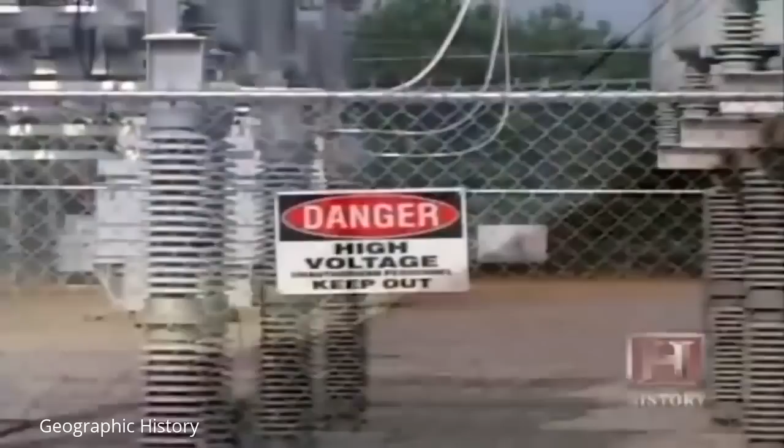Electric current, the flow of charged electrons, intimately influences how we live, yet most of us understand little about how it works.

In 600 BC, the Greeks first discovered that static electricity could be generated by rubbing amber. It wasn't until the 18th century, however, that Benjamin Franklin theorized that electrical fluid might be composed of particles. By harnessing this flow of electrons, or current, inventors and industrialists more than a century later laid the foundation for what would become the colossus of electrical generation, the modern power plant.

It can be anything from a red-hot behemoth that once started consumes trainloads of coal without interruption for years. Or it might be a nuclear plant, incongruously perched at the edge of the shimmering Pacific Ocean, a plant that on its own produces 20% of Southern California's energy.

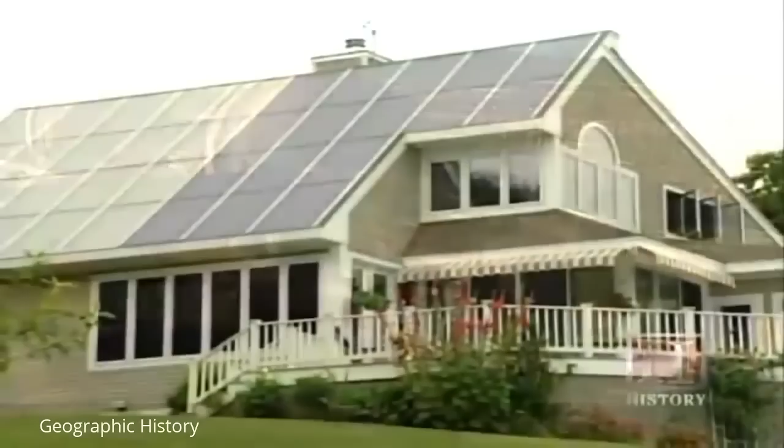Or maybe it is simply this, a house that generates more energy than it consumes and returns that surplus to the electrical grid for public use. A new model for the future of power plants.

But whatever guise contemporary power plants take, the basics of their design and their integration into commercial and domestic life were forged more than 100 years ago in a conflict between two giants of industry and invention, Thomas Edison and George Westinghouse. The outcome of the fierce competition between these two men would ultimately dictate how electricity would be generated and transmitted. But their first battle would be waged over how to bring safer light to the cities of America.

Early natural gas lighting systems in homes, for example, on occasion were quite dangerous. They had no shut-off valves, so if the lamp went out, the gas would continue to accumulate in the home, and they had some major explosions in homes.

In 1879, Thomas Edison invented the first commercially practical incandescent lamp with a high-resistance filament that glowed when heated by a low current. He soon followed this with designs for a complete distribution system for light and power.

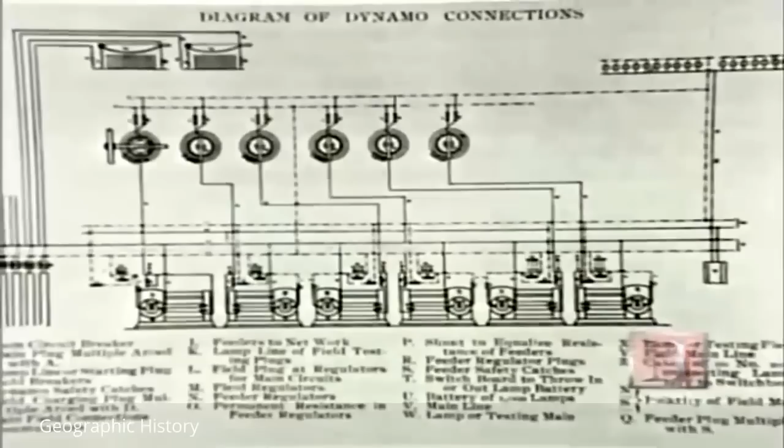On September 4, 1882, after delays and cost overruns, Edison opened the first electric utility, the Pearl Street Station in the heart of Lower Manhattan's financial district.

Edison knew that his product was going to be expensive and would need to reach many customers. The whole reason for Edison's Pearl Street Station in New York City in 1882 was to demonstrate that electric technology could be used on a widespread basis, not serving one customer like steam engines in old factories, but many, many customers. Edison's choice of direct current technology at Pearl Street limited his power plant's range.

The major disadvantage to direct current power and power plants at the time was you could not transmit electric power very far without losing a tremendous amount of the current. So you needed a power plant every half mile or mile throughout the city.

Edison's main competitor, George Westinghouse, saw that electricity's future was in long-distance transmission. Westinghouse put his company, Westinghouse Electric, to work at perfecting a system using alternating current, which flows in reversing waves which propagate more easily and with less resistance in a transmission wire.

The beauty of alternating current is that you can generate it at a very high voltage and then step it down essentially to any voltage that you need. So you could step it down to a very low voltage that somebody would need at a house for their lighting, or you could step it down to a somewhat higher voltage that some business might need or some factory would need.

In 1887, George Westinghouse invented a meter for alternating current. He thought if you were going to make alternating current commercially available, you were going to have some way of measuring what you're going to sell to your customers.

Westinghouse's aggressive pursuit of alternating current technology put him in direct conflict with Edison. It was a battle of business and technological giants, Thomas Edison versus George Westinghouse. This is called the Battle of the Currents, and it was essential because the technology that won would dominate the industry for the remainder of the foreseeable future.

With so much at stake, it's not surprising that the Battle of the Currents took a bitter turn. Edison went so far as to lobby New York State officials to have his competitor's product, alternating current, used to execute condemned men at Sing Sing prison.

Perhaps the lowest blow is when they were looking for a word to describe this. Today we say a person is electrocuted, but at the time they didn't have a term, and Thomas Edison suggested that they use the word Westinghoused, that the condemned man was Westinghoused. Obviously it's very, very upsetting to George Westinghouse.

But Westinghouse focused on the industrial competition at hand and left the courting of public opinion to his adversary. There was a great World's Fair coming up in 1893 in Chicago, and they asked for proposals to illuminate the fair, to light it at night, realizing that nowhere in the world had a major event ever been illuminated at night before. Westinghouse bid $500,000, half of what Edison bid, and was awarded the contract.

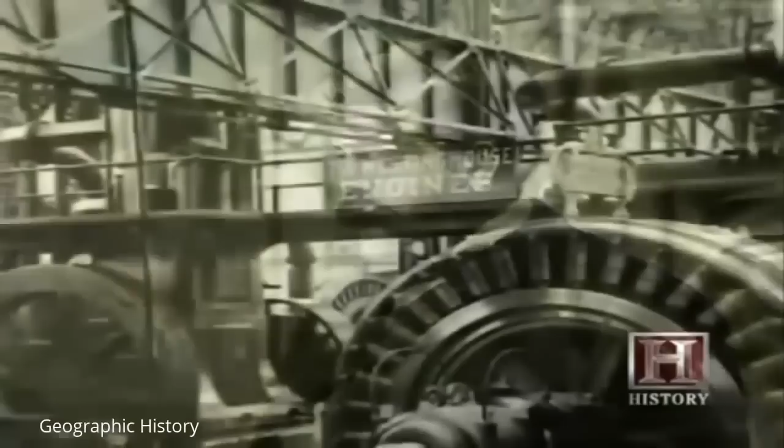He took advantage of the opportunity to promote his product, and installed a complete alternating current power plant that was on display for everyone to see. It had a giant Westinghouse alternating current switchboard, and the impressive part of that was that there was only one operator. One operator could control all the electrical equipment for the World's Fair of 1893.

27 million Americans and foreign visitors attended the Chicago World's Fair of 1893. Tesla and Westinghouse made sure that they left the fairgrounds with a good idea of who was winning the Battle of the Currents. Both George Westinghouse and Nikola Tesla realized this was an opportunity to really showcase the potential of alternating current. One display had this huge word, power, and at night there were electrical currents, just like little bolts of lightning flashing all around this illuminated word.

After this dramatic success, Westinghouse was prepared for his greatest challenge, competing head-to-head with Edison for the right to build the largest power plant in the world.

Niagara Falls. For hundreds of years, men had understood that the power of falling water could be converted into mechanical energy, the energy to run mills. But by the 1880s, there was open debate over whether the falls should be harnessed with this old technology or transformed into electricity and transmitted to industry and individuals hungry for power.

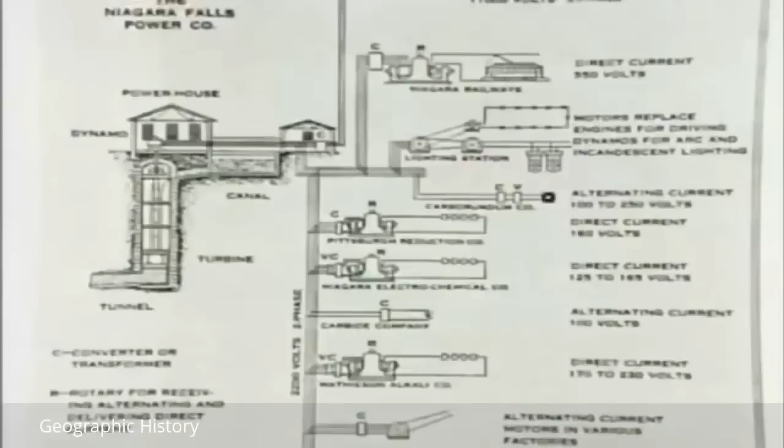The International Niagara Commission solicited plans from leading engineers to design a plant that could transmit electricity to nearby Buffalo's manufacturing interests. This was a dramatic opportunity for George Westinghouse's alternating current system. Ultimately, the decision to choose alternating current, which could be pushed much further distances over transmission lines from the powerhouse, won the day for alternating current.

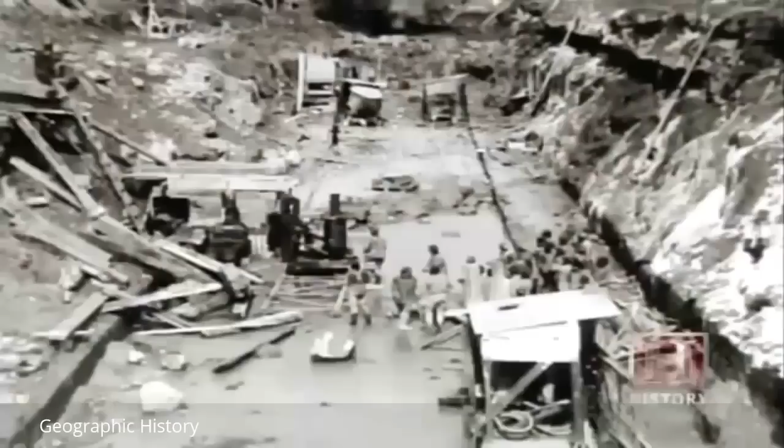It took from 1892 to 1895 to build the tunnel that would divert the force of the Niagara River to the plant's turbines. During the summer of 1894, electric cranes eased the 29-ton turbines, the largest built to date, into the wheel pits. The turbines were essentially windmill blades that could be driven by the force of Niagara's water.

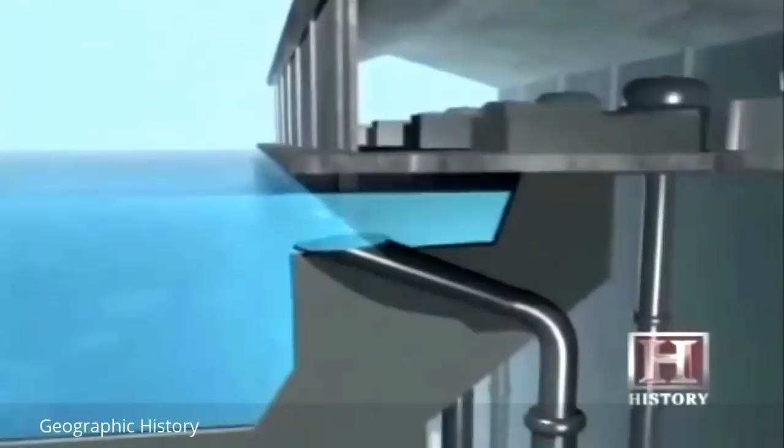When the plant was finished, water flowed through the forebays and into the penstocks, vertical pipes about 8 feet in diameter, before entering and driving the turbines, which in turn spun rotors beneath the generators.

Inside the generator, a magnet spun, creating a magnetic field which induced an electric charge in a casing of copper coils, thus producing electricity.

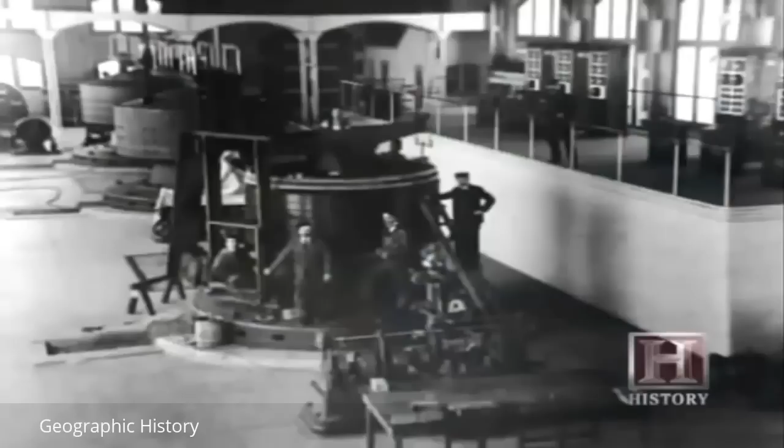In 1896, the Niagara Power Station began transmitting power 17 miles to Buffalo, New York. But it wasn't until 1901 at the Pan American Exposition on the Buffalo Fairgrounds that the general public was able to witness a large-scale display of the wonder of long-distance electrical transmission.

In order to transmit electricity over this distance, transformers at the plant increased voltages to 11,000 volts, 4 times the voltage of an 1891 plant that Westinghouse had built.

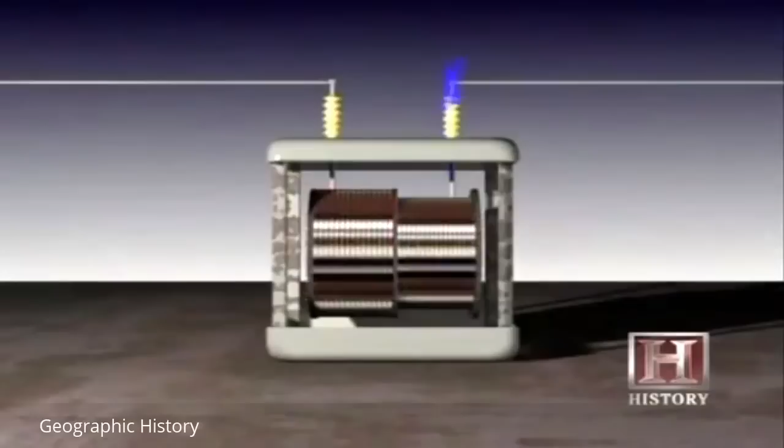Inside a transformer, an electric charge passes through one wire coil, inducing a higher or lower charge in another separate coil. Voltages multiply at the ratio of the number of turns in the secondary coil to the number of turns in the primary coil.

What the Westinghouse engineers understood very clearly was that large power plants, which could produce large amounts of electricity and serve larger numbers of people over a wider area, needed the use of transformers to increase the pressure of electricity, to be able to push it longer distances.

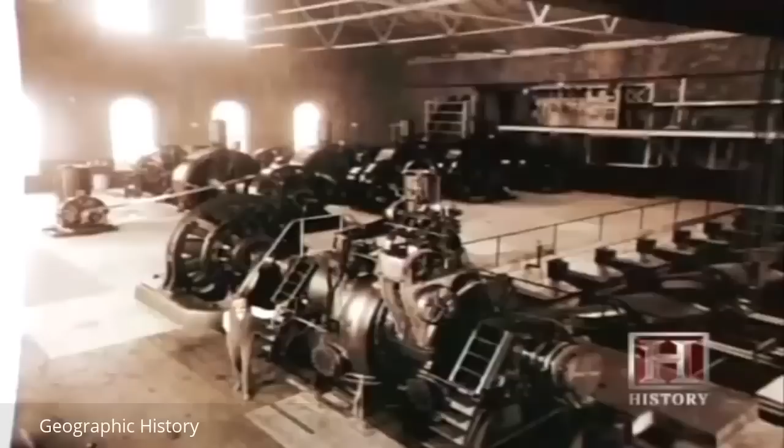The Niagara Power Plant provided not only a technical blueprint, but also an economic model that would be duplicated time and again over the coming century. If you build it, they will come. Heavy industry, in this case, would congregate around a reliable, cheap energy source.

There was a fellow in Pittsburgh named Hall who had an early process for producing aluminum using electricity. So he moved his company from Pittsburgh to Niagara Falls when the power became available. That company went on to change its name to Aluminum Company of America, and as we know today, it's the largest aluminum company in the world.

It soon became clear as electricity flowed out of the Niagara Power Plant that alternating current was here to stay. After Niagara, even Edison abandoned DC for AC technology.

I think it would be very fair to call George Westinghouse the father of the modern power plant. He was the catalyst. He was the person that had the commitment for this 10-year period of time to pull the resources to make alternating current successful.

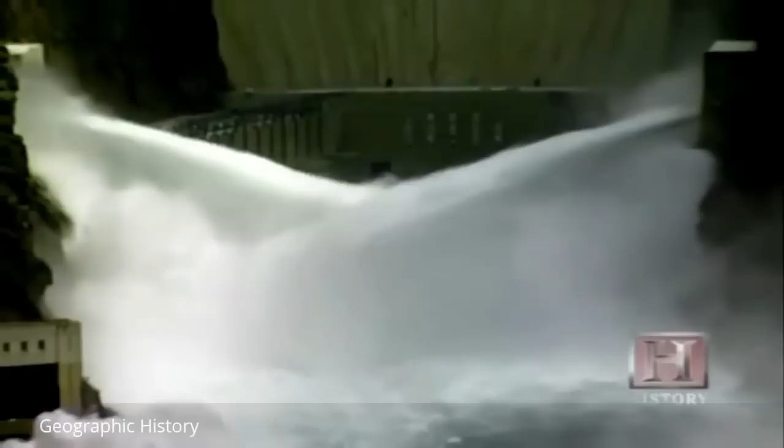In the ensuing decades, improvements in the electrical engineering of turbines, generators, and transformers would lead men to dream of a bigger and better source of water power. This dream would culminate at Hoover Dam, 40 years after the first electricity flowed out of Niagara.

At 726 feet in height, weighing in at 6.5 million tons, and forming a 150-mile lake, Hoover represented a stunning increase in scale to Niagara and is still one of the world's largest dams. Hoover's transmission voltage of 287,000 volts speaks to the engineering leap that had taken place.

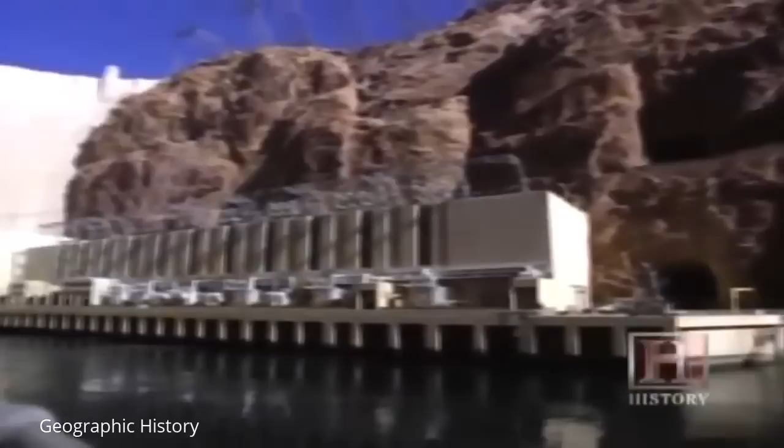A number of people compare Hoover Dam with the earlier Niagara Falls installation. The difference between the Niagara Falls of the early 1890s and Hoover Dam in the mid-1930s is the improvements in technology over that period of time: larger, much more efficient generators, and most importantly, very high voltage or high pressure transmission systems.

Whereas people 17 miles away from Niagara Falls could receive electricity in the early 1890s, by 1936 and 37, when power was coming out of Hoover Dam, it was going over 250 miles to Southern California.

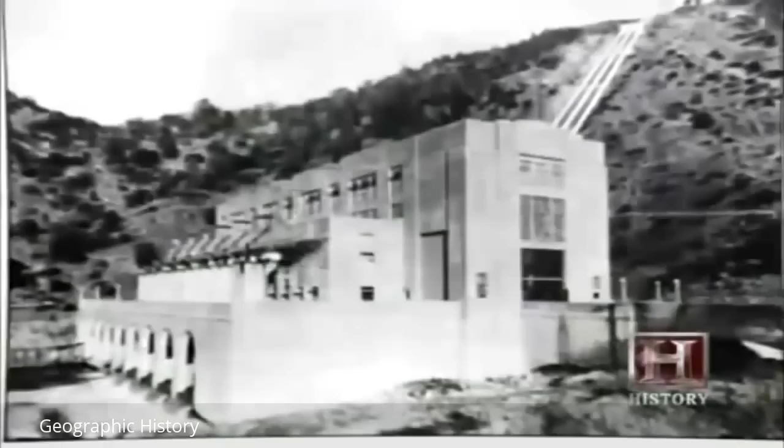In the decades between Niagara and Hoover, privately owned power companies flourished throughout the country. It did not take long for company owners to realize that consolidation was the only way to profit in an industry that required so much investment to build infrastructure.

Tom McCarter had been the Attorney General of New Jersey. His idea, which was very novel at the time, was to basically draw a line between New York City and Philadelphia and buy up all the municipal light and gas companies and traction companies that existed between those two major points. By doing so, he was able to generate the critical mass necessary to go out and begin to fund the tremendous infrastructure that was going to be required to build the electric system.

It was also a major step in the growth of the transmission grid. More customers meant greater revenue. An expanding utility could afford the expense of running transmission lines, linking multiple plants into a regional grid. This system spawned the giant interstate power transmission grids that today cover thousands of square miles.

Improved transformer technology and higher voltages meant electricity could be sent farther and farther. By 1903, you had over 100,000 volt technology, which meant you could push that electricity 150 miles or more. By the early 1920s, you had 220 and 230,000 volt technology, which meant literally anything within a range of about 300 miles of the power plant could receive electricity.

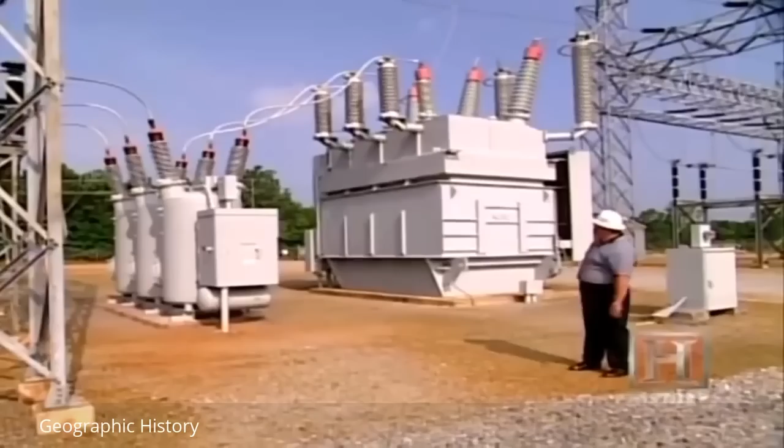Transformers at the substation alter the voltages so that electricity can be routed where it needs to go. We're standing in front of the 230 to 115 kV transformer, the big box here. The transformer converts the 230 kV voltage down to 115,000 volts and supplies power to the 115 bus, which is then shipped out across the 115 kV grid.

Electricity flows along the 115 kilovolt power line and gets stepped down as it nears its destination, private homes. This is a typical distribution transformer serving a home. Distribution line is either 12,000 or 25,000 volts. It's stepped down to 120 to 240 volts to feed the house for normal television, lights, appliances, everyday use.

This kind of everyday use has fueled the demand for power throughout the century, as consumption and desire for comfort have grown. To meet society's runaway electrical needs, utilities built their bread and butter plants.

What eats 36,000 tons of coal a day and never needs a rest? On 2,000 acres in Bartow County, Georgia, sits the second largest coal-fired plant in the United States, Plant Bowen. Owned and operated by Georgia Power, the facility produces in 15 seconds all the electricity a home will use in a year.

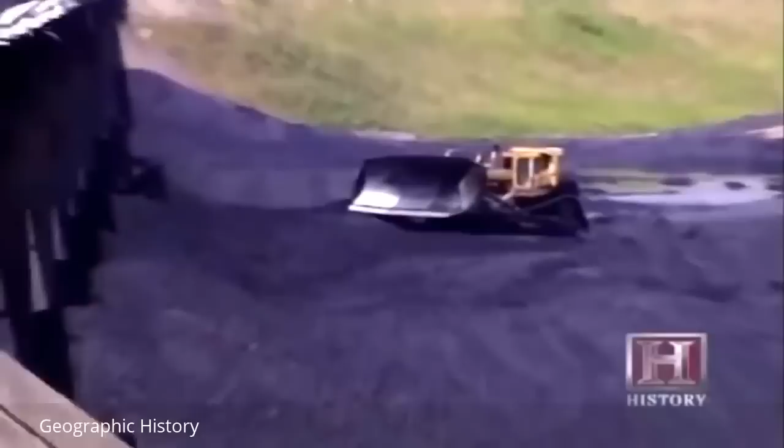With the exception of hydroelectric power in water-rich states, most of the country's electricity has been generated at coal-fired plants. In its heyday, coal was as plentiful as environmental concerns were scarce. Investment flooded into utilities, and coal plants grew bigger and more efficient. Power plants went from small cottage industry to big, massive power plants.

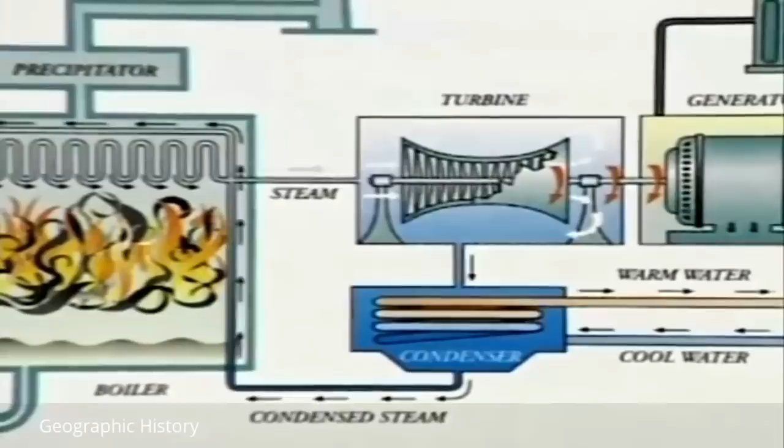They were taking this steam cycle and really wringing every ounce of energy from it that they could, and doing so in a very efficient way. Basically, the way you generate electricity, you take water, and the simplest cycle is you boil it, and you create steam, and you pressurize it with the heat you're introducing into it, and you put it through a turbine. The turbine is a simple fan, and as you introduce the high-pressure steam, it turns a generator.

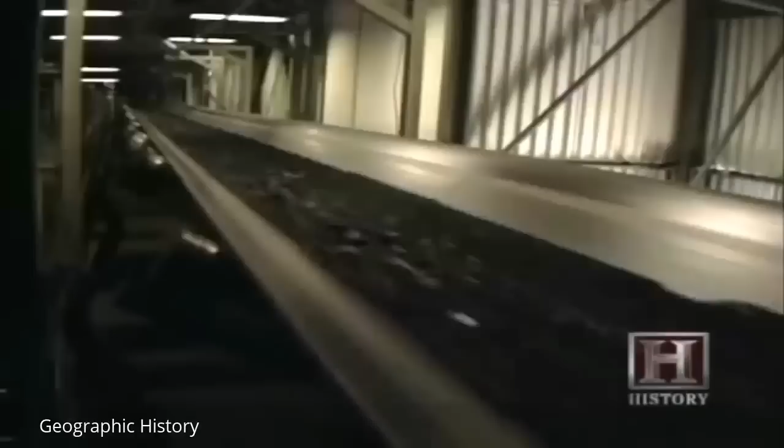But this simple steam cycle was wasteful. It would take about 10 pounds of coal to produce the amount of energy it would take to light a 100-watt light bulb for an hour. That's a very significant amount of coal. Today, through technological changes, we've been able to bring that down to where now we're far under 1 pound of coal to produce the same amount of energy.

It took a combination of disciplines to affect this kind of fuel efficiency. You had power plant engineers refining that process, increasing the thermal efficiency, finding out how to use fuels in a more efficient way. You had metallurgists working on piping, trying to bring temperatures up higher. You had boiler feed pump folks working on producing tremendous amounts of pressure. All this to supply energy to a growing population and industrial base that demanded more power.

Engineers call this demand load, and this load changes depending on the season and time of day. Load is the electrical demand on our system. If you turn a light bulb on, that is putting a load on our system. It's putting a demand for the use of electricity.

The use of power goes up dramatically during the day, particularly today with air conditioning, so that you have very low levels of load at 8 o'clock in the morning. It goes up higher and higher in the morning period, and then about 3 o'clock in the afternoon, everybody's air conditioning is working at its maximum, industry is working hard, and that's the maximum peak load.

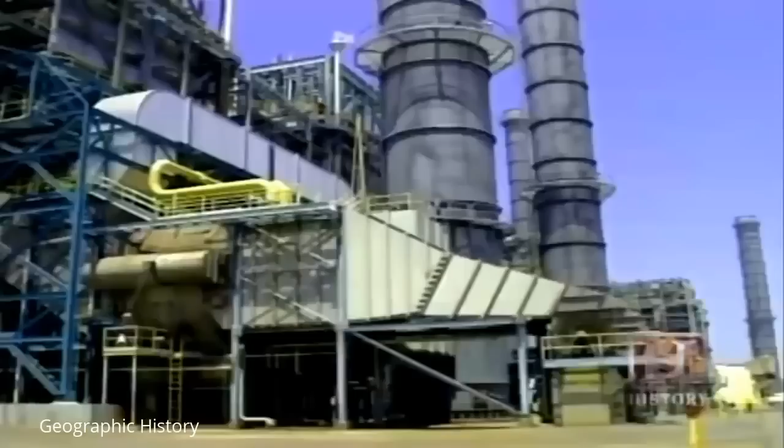To service this energy cycle, a utility needs 3 types of plants. You have base load, which is 24-hour load, a plant that can run full-time. You have intermediate load, which is a plant that will cycle, coming on in the morning and shutting down at night. And then you have peaking facilities, which run for just a few hours a day. You need 3 different kinds of machines to cover those loads.

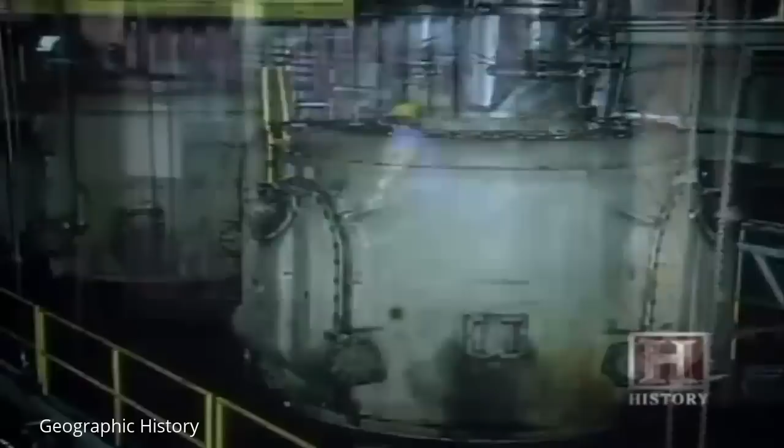Plant Bowen is what we call a base load power plant. The economics of operating it are such that it pretty well runs day in and day out, 24 hours a day. It takes 4 9,000-ton train loads of low-sulfur coal arriving from eastern Kentucky each day to supply the plant. The coal is pulverized to the consistency of talcum powder before being blown into the boilers to be burned to heat water.

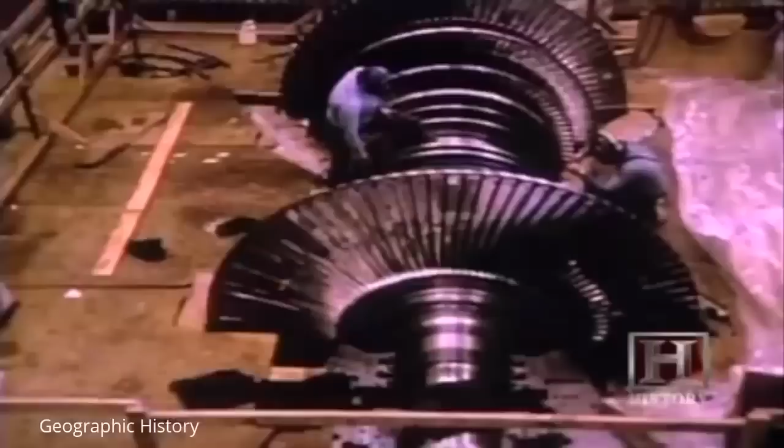It's turned into steam that has a temperature of 1,000 degrees and a pressure of 3,500 pounds per square inch. This steam is delivered to a turbine, turning it. The turbine is attached to a generator, and the generator and turbine spin at 3,600 RPMs, generating electricity which we put out on our transmission line.

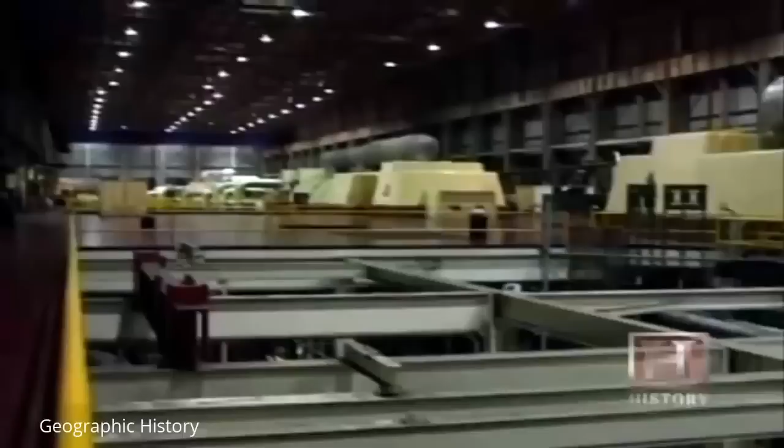Once the steam has done its work in the turbine, it enters the condenser, where it flows over 36,000 copper tubes containing water from the nearby Etowah River. The river water absorbs heat, condensing the steam back into water so it can be reused in the boiler. Hot river water is then cooled in 400-foot high cooling towers, each cooling 300,000 gallons a minute.

Not surprisingly, it is no longer possible to find communities who will welcome a plant of Bowen's scale with its looming 1,000-foot high stacks. As a result, utilities like Georgia Power have developed peaking facilities with much smaller footprints, both in terms of land use and environmental impact. Combustion turbine plants like Plant Dahlberg in northeast Georgia burn natural gas or fuel oil instead of coal, in what is essentially a souped-up jet engine.

The gas turbine engine uses hot air and not steam to produce electricity. Fuel mixes with air, is burned, and the expanding gases drive the turbine. Once the turbine spins, the process is much the same as in a steam cycle plant.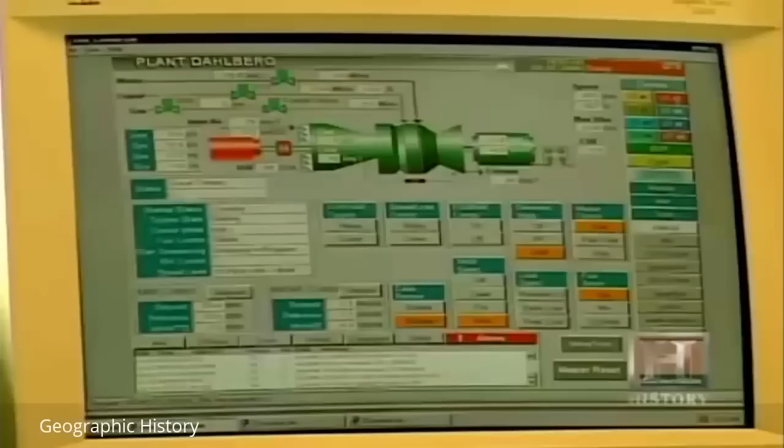The technology for this type of unit with the combustion turbine is very similar to what you would see on a jet engine. The jet engine has a compressor, brings air in, compresses it, burns it, and produces the power they use in thrust. This is a much larger machine doing the same thing. It has been equated to a jet engine on steroids.

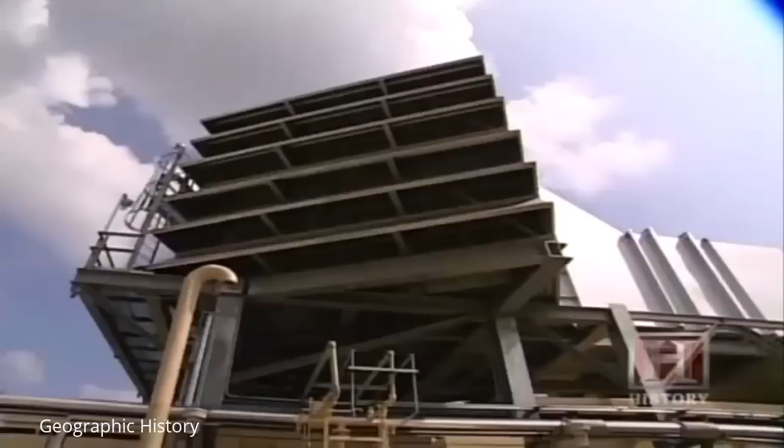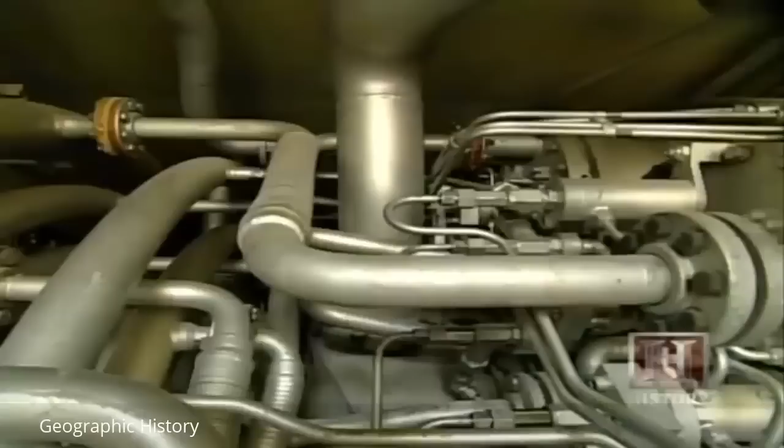Plant Dahlberg's 8 units combined produce about 600 megawatts of energy, less than the output of a single unit at Plant Bowen. As a result, the turbines are only used to produce supplemental electricity when it is needed, to provide energy to get you through the high demand period of the day.

Today, the energy market and societal pressures for safer, cleaner power have created a demand for smaller plants that are more evenly distributed on the landscape. This is changing the shape of an industry whose motto had always been, bigger is better.

Built during the years that followed the Depression, those bigger plants produced more power, but in the 1930s and 40s, rural farms had no way of tapping into that power. Remote, expensive to reach with transmission lines, they simply were not on the grid. Investor-owned utilities primarily did not want to go to the cost of providing electricity to rural customers, because you would face the cost of building power lines, in some cases 100 miles long, that would only serve maybe 4 or 5 customers. No return on your investment.

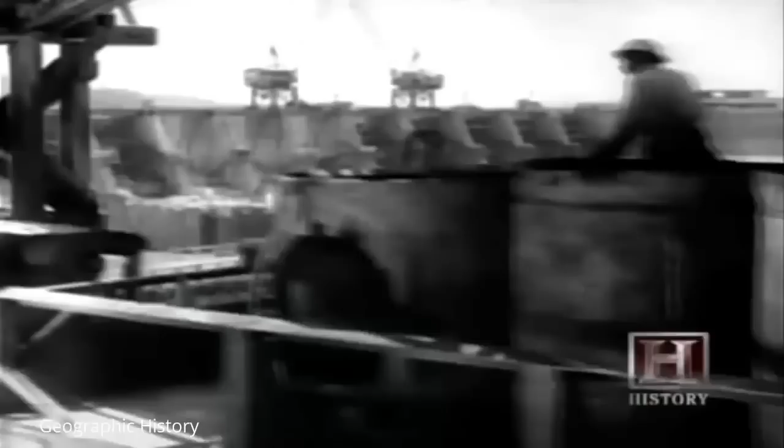President Roosevelt and the Congress established the Tennessee Valley Authority in 1933, and the Rural Electrification Administration in 1935. The agencies shared the goal of bringing electricity to rural America, where only 10% of farms had power. The TVA ostensibly began as a flood control effort by the Army Corps of Engineers, but it was quickly used as a way to find new sources of hydroelectric generation on the rivers of the area.

Dams were built, ultimately totaling 42 in the system, and a massive hydroelectric power project was launched, which grew to a total capacity of 4 million kilowatts by the 1970s. By this time, the mission of the REA and the TVA had been accomplished: 98% of all farms in the United States had electric service.

Once the TVA had exhausted the hydroelectric possibilities of the river basin, administrators turned their attention to other forms of power. In later years, the TVA moved away from its hydroelectric base and actually was a pioneer in the scale-up of some of the coal-fired boiler technology that we see today, and became a diehard proponent of nuclear power in the 50s and the 1960s.

Next, the half-life of nuclear power: how a technology grew up and got old before its time.

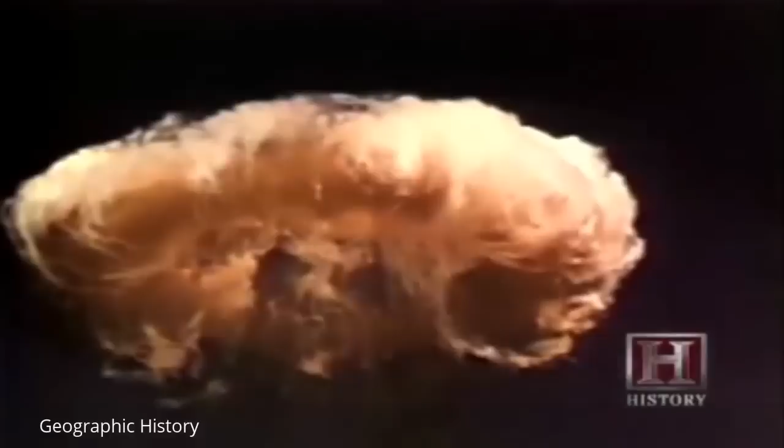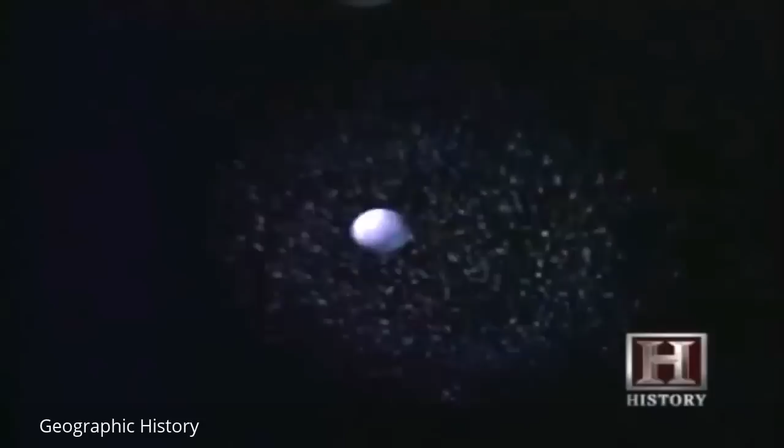Fission is the process in which natural radioactive elements, like uranium, are bombarded with neutrons. They split into other elements, and when they split, they release energy.

Fortunately, not all nuclear reactions end in devastation. It was the peacetime harnessing of atomic energy that spawned the nuclear power industry. The first privately financed and commercial nuclear power plant built without government help was the Dresden 1 facility outside of Chicago in 1959.

If you think of the Manhattan Project, the atomic bomb, and the ending of World War II, the advancement in that technology over a 10 to 15 year period was pretty dramatic. Today, more than 100 nuclear power plants are operating in the United States, supplying 20% of the country's energy needs.

San Onofre is what we call a baseload power plant, which means it tries to operate 24 hours a day, 365 days a year at full power output, which in the case of each of these reactors is a little over 1,100 megawatts of power. The San Onofre Nuclear Generating Station in California's San Diego County supplies energy for 2.5 million homes and businesses.

Fuel is uranium. Uranium has the natural ability to fission, meaning the nucleus of the atom can literally tear itself apart. When it does that, it releases a tiny amount of heat, but it also releases additional neutrons. Inside a pellet of uranium, there would be billions and billions of atoms, so in very short order we can get a chain reaction going. When you have a billion atoms releasing a little bit of heat, it becomes a large amount of heat.

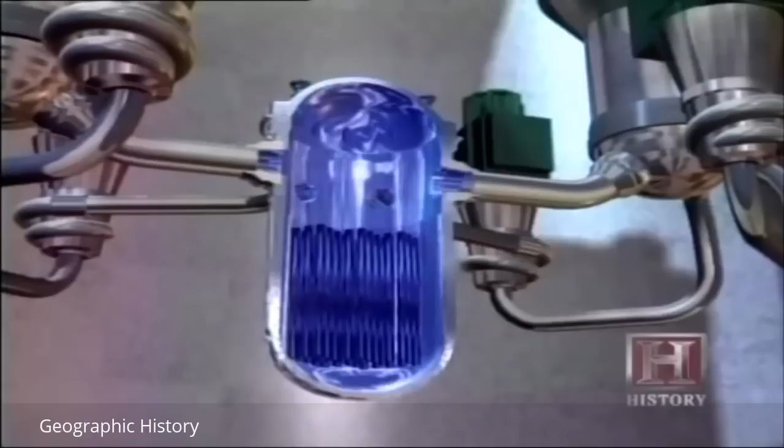The reactor and its circulating system are filled with water, which submerges the fuel core. If you were to put a thermometer on the fuel assembly itself, it would be in excess of 600 degrees. As the water circulates by that hot uranium, it gets hot, comes out the other side, and goes into two very large devices called steam generators.

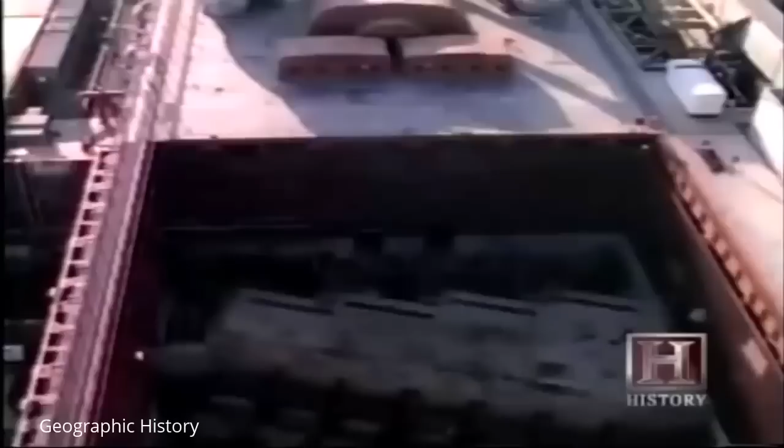The steam drives the mechanical turbine, causing it to rotate at 1,800 revolutions per minute. That in turn turns an electric generator, and electrons are forced through wires, making electricity to power homes and businesses. The row of turbines and the generator together weigh in at 800 tons, the equivalent of 800 Volkswagen Beetles. But despite this massive scale, it's still a fundamental process.

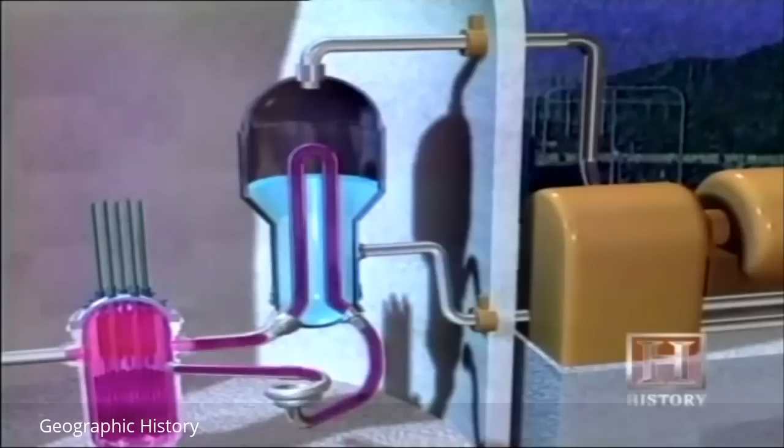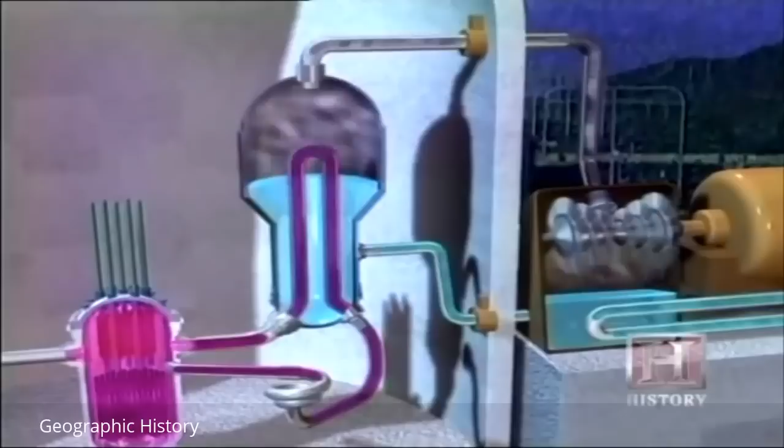As radioactive water from the reactor flows through the steam generators in a closed system, it heats clean water in a second closed system before returning to the reactor. The clean steam drives the turbine and is then cooled by ocean water before returning to the steam generator, where it will again be turned into steam.

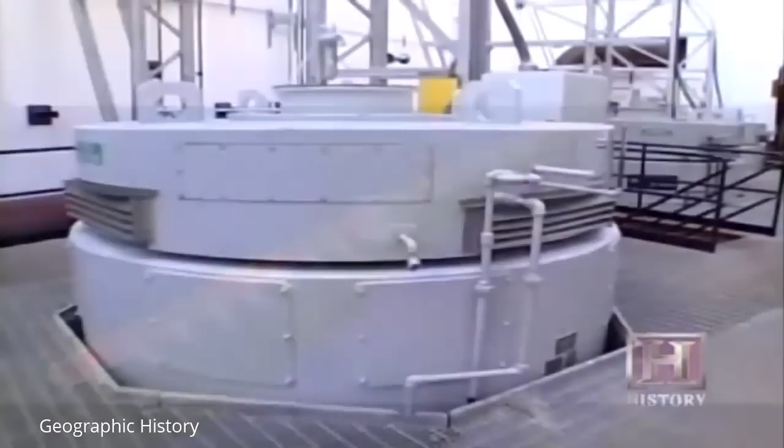Behind me is the Pacific Ocean. About 3,200 feet offshore, we have a 16-foot diameter pipe in the ocean, and when we turn on the pumps, we draw in about 1.6 million gallons of water per minute.

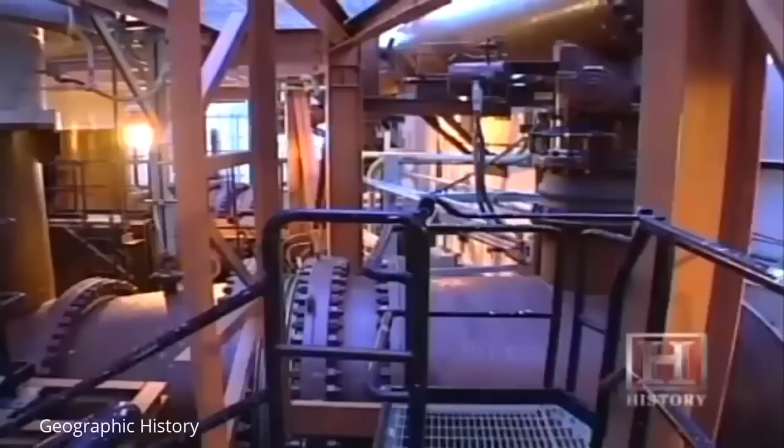The pumps are run by 4,000 horsepower motors, the equivalent of 6 NASCAR cars running at full speed. Each pump is capable of draining an Olympic swimming pool in 15 seconds.

If for any reason engineers needed to stop the nuclear reaction, they could do so by lowering an array of control rods into the core. The control rods absorb the atom-splitting neutrons that are driving the chain reaction, bringing it to a halt.

But the surprising aspect of this plant is that, to a great degree, it runs without stopping. It can run for 2 years without needing new fuel at full output. San Onofre Unit Number 2 has been operating for about 530 days consecutively. If this was a natural gas plant, an oil plant, or a coal plant, we'd constantly need trains or pipelines bringing in fuel.

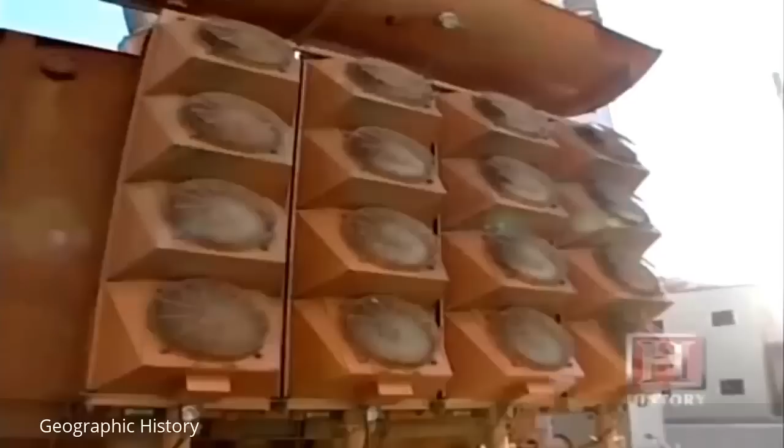Outside, transformers step 22,000 volts of electricity up to 220,000 volts, essentially pressurizing it for transmission throughout Southern California.

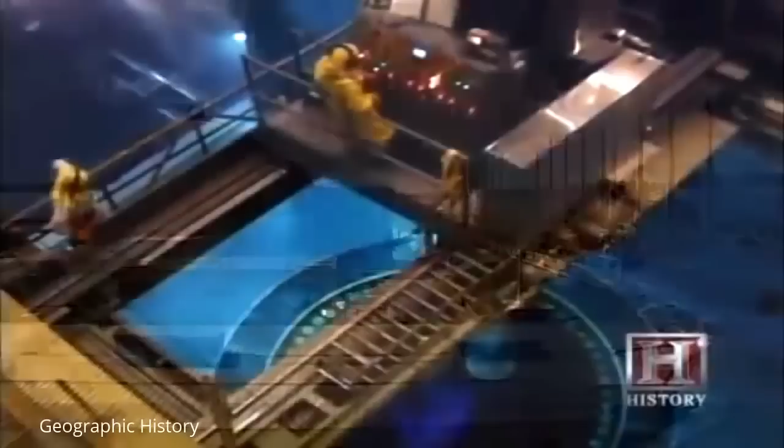Although nuclear power is a relatively new and seemingly successful technology, it has yet to recover from an accident in Harrisburg, Pennsylvania. The most significant event from a safety standpoint that has ever happened in the U.S. nuclear power industry was the Three Mile Island accident in 1979.

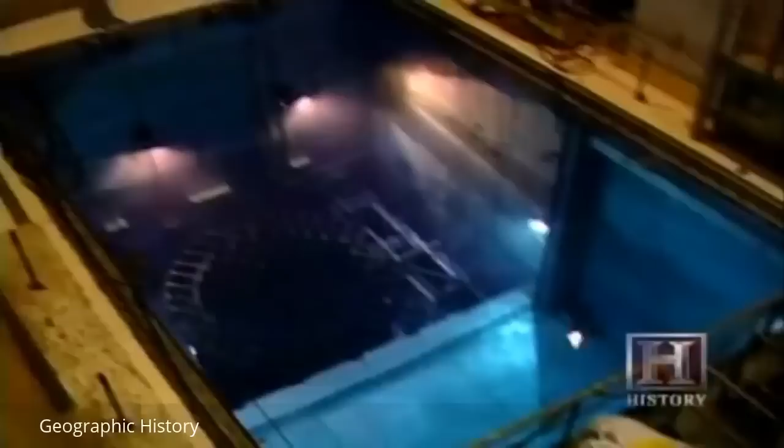This was literally a brand new reactor with brand new operators. At 4 o'clock in the morning, because of a combination of human error and mechanical design, they allowed the reactor's core, the uranium, to be uncovered for several hours. Without any water to keep the uranium cool, the uranium overheated and actually melted.

Evidence suggests that fallout from the accident was low, but the public relations setback was immense. No new plants have been built since.

However, most nuclear power advocates predict that the industry will stage a comeback. In my opinion, there will be a rebirth of nuclear power. It's not a question of if, it's a question of when.

Proponents suggest the question of what kind of waste we want in our environment may well be nuclear power's most convincing argument. Nuclear power in the United States supplies about 20% of the electricity in the whole United States. That would probably surprise most people that it's that high. In that 20%, that avoids, on a yearly basis, the emission of about 177 million metric tons of greenhouse gases that would be emitted into the atmosphere if that 20% nuclear power was replaced, say, with coal or oil.

I would say that in the next 10 to 20 years, you will see the percentage of nuclear power rising, because that's a good way to address the global warming issue, and you do not have any solid waste other than the radioactive waste that you have to deal with. But I feel like we'll figure out a way to manage that problem.

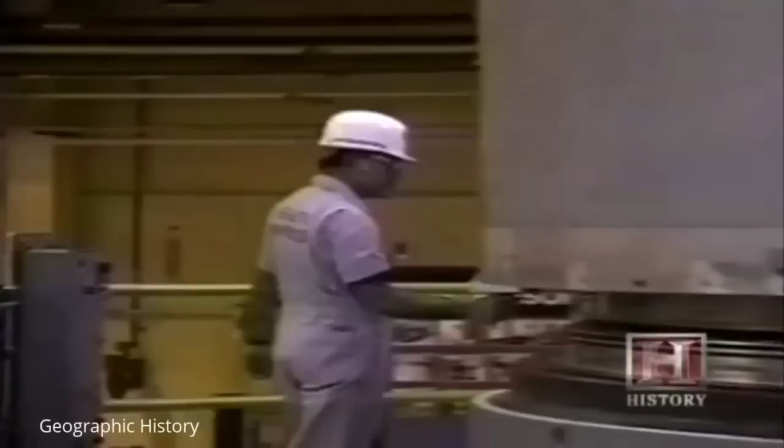Perhaps. But the 3,000 tons of spent fuel that the industry produces each year has no permanent home and is simply being held at the nuclear plants that produced it. Since this waste will remain radioactive for thousands of years, it's not surprising that most elected officials continue to say, 'Not in my backyard.'

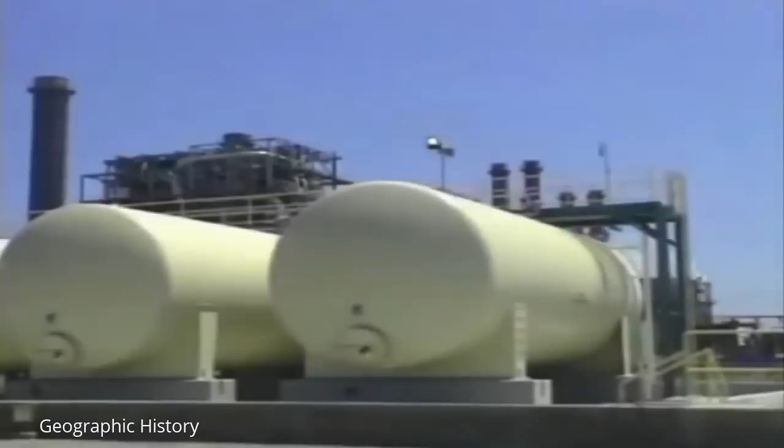Next, electrical consumption grows as interest in conservation wanes. How will power plants of the future meet the demand? Although the history of power plants is largely one of growth and technological triumph, the future of electrical generation could not be more uncertain.

What is clear is that we have come to a crossroads where environmental concerns, unchecked consumption, and technological limits meet. The size of a power plant really has capped out at about 1,000 megawatts.

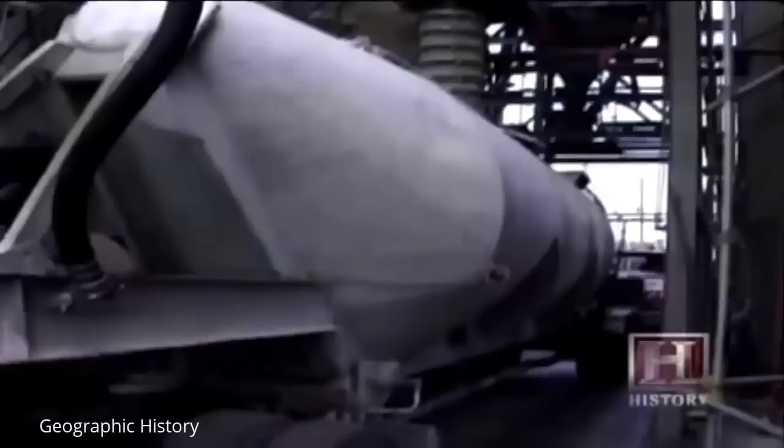And I was thinking about why that's really the limit. The boiler in a coal facility right now is the size of an apartment building. It's 11 stories high. Right now you've got turbine blades that in some cases are 14 feet long. And the tip speed of something 14 feet long, rotating at 3,600 RPM, starts to get supersonic.

Today, the country's electrical needs are supplied by regional interconnected power grids that in theory ensure that power flows where and when it is needed. In practice, these grids are straining to meet demand.

It's really a series of regional grids at this point. I mean, theoretically, you can move power from Texas to California. However, there might only be one really good path to do that. But ideally, you would want to have more options than that.

The lack of options in routing electricity is further complicated by heavy demand in summertime that is beginning to cause power shortages. It's an issue of generation. It's an issue of not having enough kilowatt hours in the system. And it's occasioned by catastrophic failures at a facility or even small problems that take it offline for several hours.

The flip side of insufficient power generation is a countrywide lack of interest in energy conservation. I see probably less emphasis and care about energy efficiency today than I ever have. I can't even get people that I know to turn off their lights when they don't use it. Right here in my own office, I can't switch off the lights.

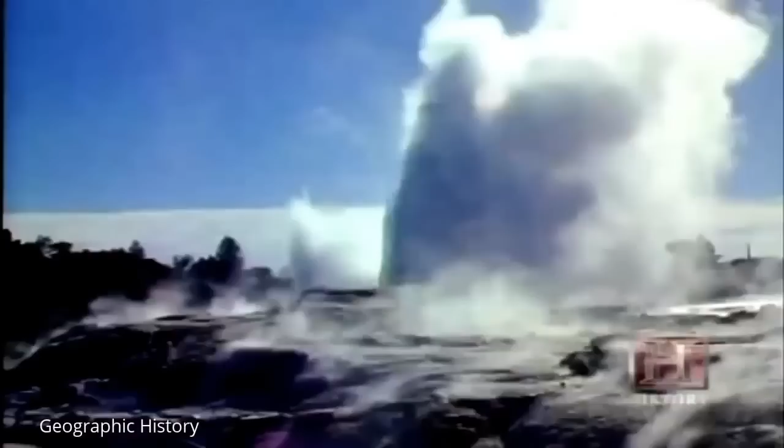But which one? The Earth's core is much hotter than the Earth's surface, fortunately, and the interaction of these temperature gradients comes very close to the surface in many parts of the world, and that can be used to create a hot fluid or create steam, which then drives conventional turbines.

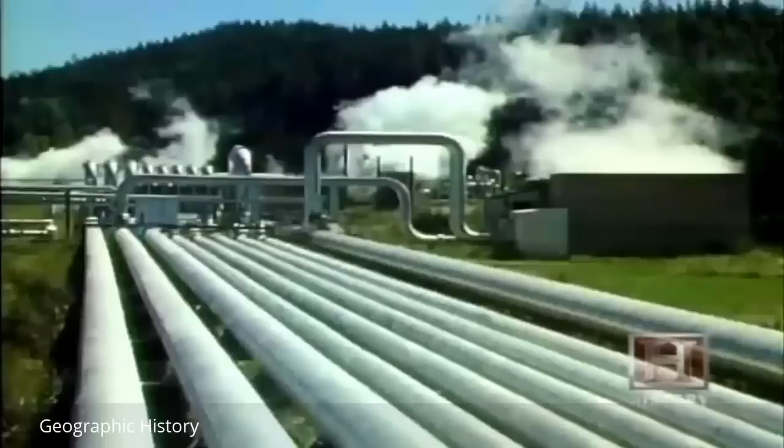At a geothermal plant, wells are drilled hundreds of feet below the Earth's surface into reservoirs with temperatures of 180 degrees Celsius or more. Although Mother Nature supplies the heat, geothermal sources like geysers are neither widespread nor clean. Fraught with problems in terms of, first, it's tough to locate. There is none in the Northeast that I'm aware of, so we have difficulty using it here.

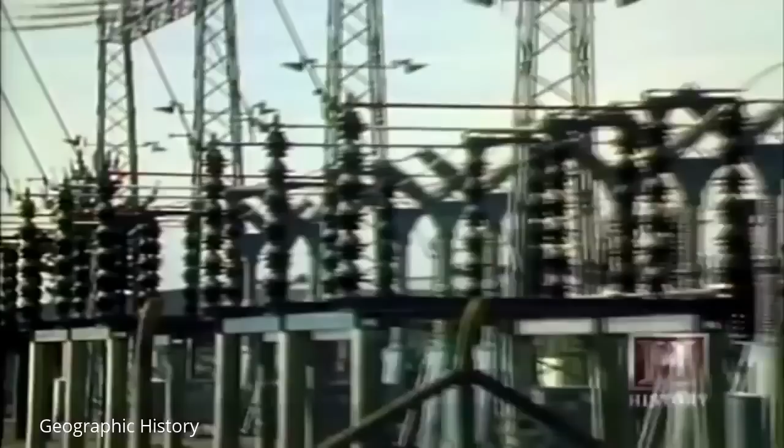With a geothermal facility, your primary pollutant is hydrogen sulfide. So the problem there is taking the hydrogen sulfide out, capturing it, and then finding some way to deal with that once you've captured it.

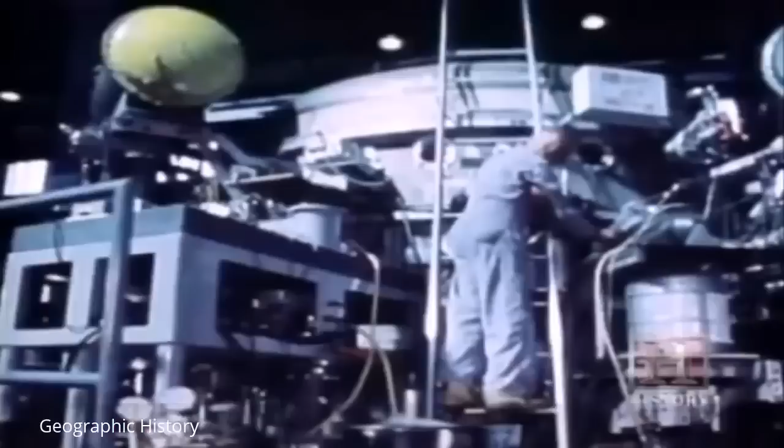The most futuristic of technologies, fusion, combines two light atomic nuclei to form a single heavier nucleus. This generates heat levels similar to the plasma state of the sun. That's a dream for egomaniac scientists who figure that they can take the absolute most cataclysmic forces that be known to man and manage them.

There is, however, a less dramatic way to capture the energy of the sun: solar power. But the debate surrounding it is about efficiency, not safety. Even in areas of the country where the sun shines a lot, like in the desert Southwest, the technology is still very behind in being able to supply the big base load plants, like coal or nuclear plants.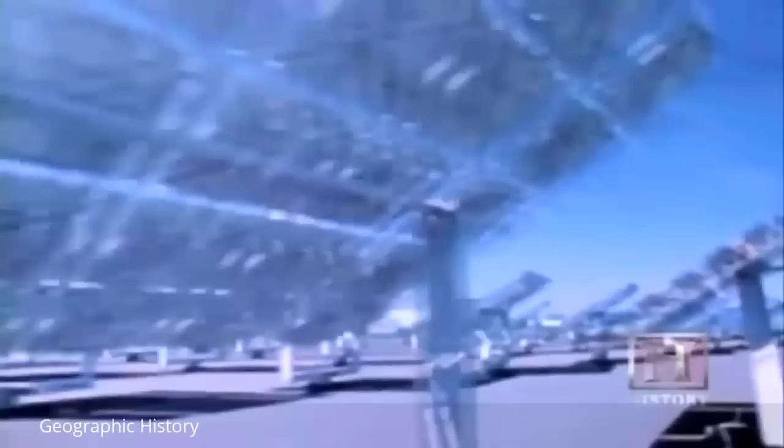For an example, to replace an average nuclear plant would take about 600 square miles of solar cells with today's technology. Solar advocates say that it is not so much the technology, but the concept of massive centralized power plants that limit solar's effectiveness. Perhaps the power plant of the future looks something like this.

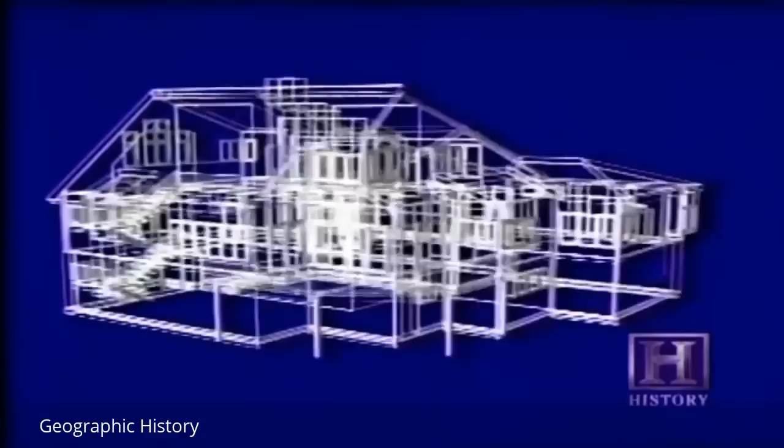A house on the Maine coast that generates more energy than it consumes. This house incorporates both solar thermal for space heating and hot water and solar electricity for electrical production. The panels are integrated to form the finished weathering skin of the south roof, and the house pretty much exists in terms of its heating, hot water, and electrical energy requirements from the harvested energy that falls on the roof.

The house does more than just exist. It contributes to the energy needs of its community. And homeowner William Lord is quite proud of this fact. We make most of our own hot water and all of our electricity. In fact, we generate more electricity than we actually use. So the process of fitting into the environment is seamless in our case and is not disruptive.

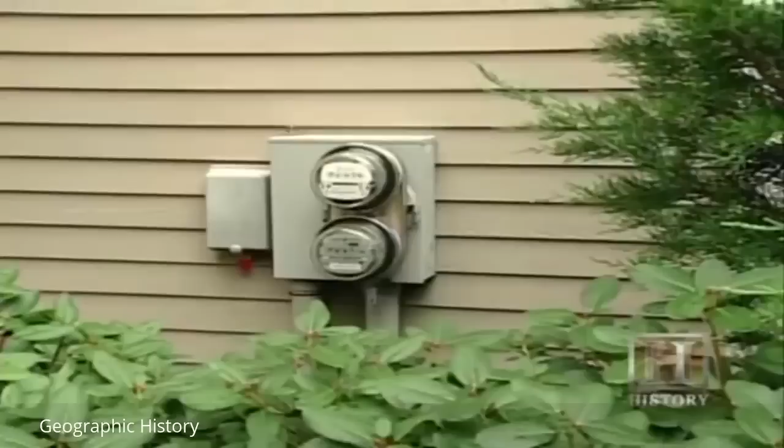Solar power not only makes environmental sense, but economic sense as well. We have 2 meters on the house. One measures the excess energy that we export to the power company, and the other meter measures what energy we take from the power company. And in Maine, we have something called annualized net metering. And the bottom line is that we essentially pay no electric bill annually.

When we built our solar house, we didn't realize we were actually creating an event. We added to that event a place where people come to learn about solar power. We have many visitors here. We added to that event our website. The Maine Solar House gets more than 1 million hits a year.

This month I'm taking a look at a house in Kennebunkport nearby. The former President of the United States, George Bush, has solar thermal panels on his roof. I think that's a great hope for everybody because clearly that is probably the best way to produce power. Taking incident solar energy doesn't pollute anything.

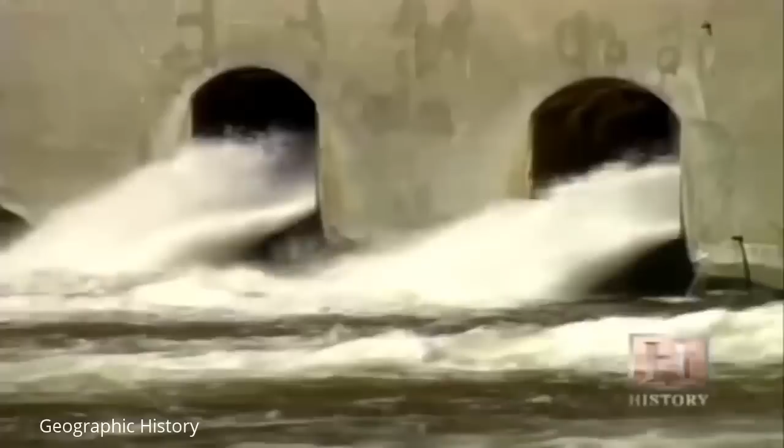The direct conversion of solar energy into electricity with photovoltaics is the most environmentally benign method of making electricity. And so that, coupled with other conversion measures such as wind energy conversion and hydropower, can combine to gradually displace the conventional systems to build a resilient energy economy based on renewables. It's not a question of if, but when.

And from my perspective, time is short. We should be investing the relatively plentiful and relatively inexpensive reserves of conventional energy to build this technology bridge to the future, because these are finite resources and they are not going to be here indefinitely.